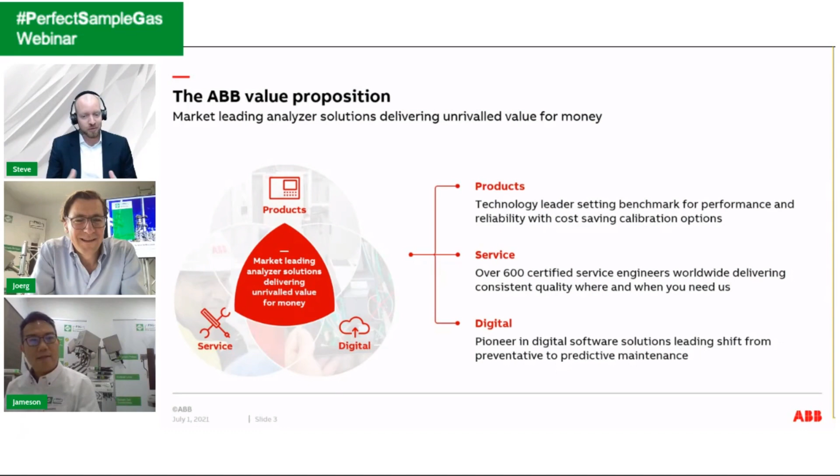And then the really fast moving development is around digital, and ABB is really pioneering digital software solutions. But today we're going to focus more on the products and then show you a little bit on the digital solutions. And I think we've got a demonstration for you as well, so I'm really looking forward to sharing that with you. Let me take you through some of the portfolio here.

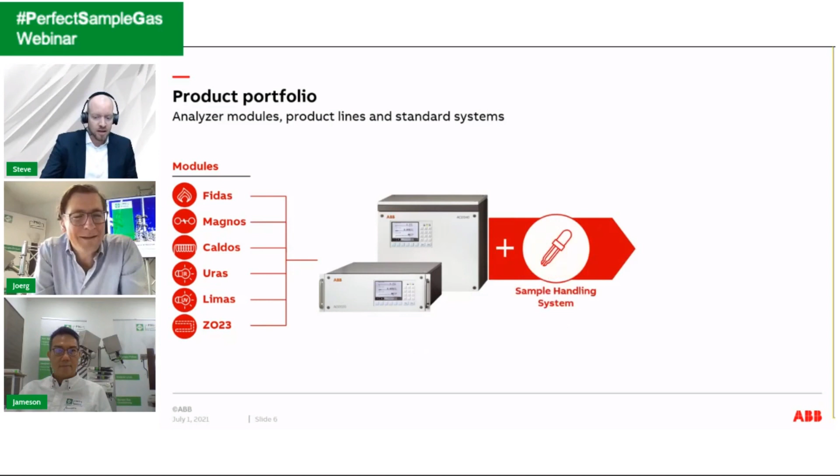Wow, but obviously, Steve, if I may ask, that means the Easy Line is more kind of a basic version. It's a little bit our philosophy where we say, okay, the inside technologies are similar, but the number of options and the number of extensions you have are more limited compared to AO. Yeah, limited to really the things that you always need for an application. So we stripped it right the way down. So you still have quite a bit of flexibility, but not as much as the Advanced Optima. Right. Okay. I got it.

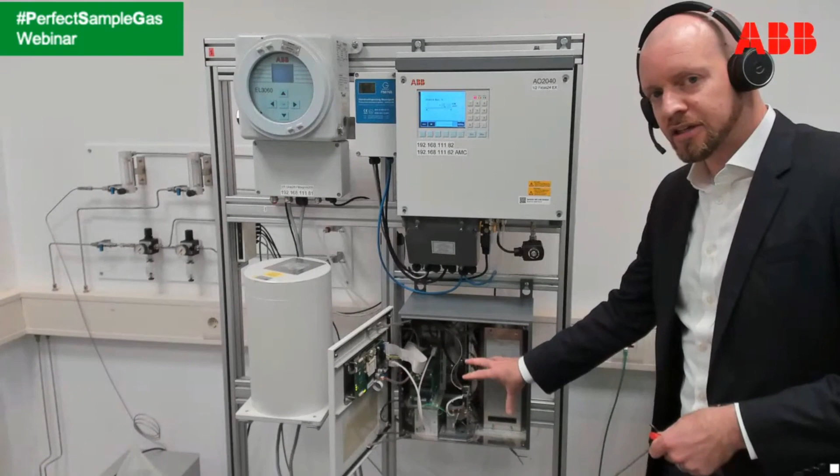Interesting. And then the other one here is the EL3040. I'll just very quickly open that box so that you can see. So this is for general purpose, but very compact. This is the Uras 26 photometer, and then you also have under here a paramagnetic oxygen detector, so that shows you the combination of the two. And then again, the same electronics, but underneath here you have a connection box which allows this to go into an IP65 environment. So you could install this outside. It's a stainless steel box, very robust, and that often for customers is very useful.

Yeah, good. Sounds interesting. I'm going to make my way back over there. See you in just a second. Okay. Wow. Hopefully you will make it. Oh yeah, that's great. Impressive. There he's back. There you go.

So Steve, let me ask you. These are new products you are releasing now. Do you also see a trend that there are more hazardous area measurements? We saw this in our product development. We released this new ATEX probe. And it's a little bit the feeling that even the measurements in hazardous areas are growing. I think in general, yes.

So maybe historically you could move the analyzer systems into a safe area, but then you compromise on the speed of the measurement. So more and more we're seeing the devices moving closer to the measuring point, and there you obviously get more into the hazardous areas, zone 2, zone 1, and that's why there is increasing demand. But I think there's also obviously a growing safety focus, and then there's more need to control the processes as well. So that's another reason why you would see an increase in demand.

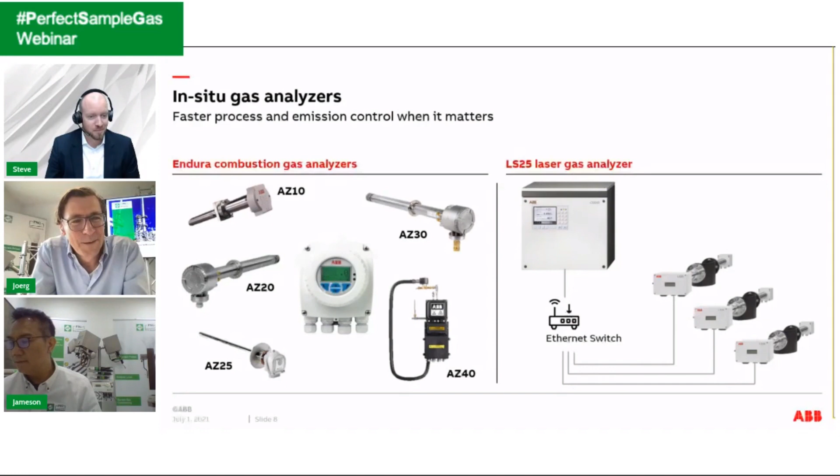Good. Then I would move on to newest developments, and here we have a couple of things to talk about. The first one is, you asked me in the preparation, what about measuring technologies and what kind of innovations are taking place there? Here I would share the example of our Magnos 28. It's a fairly new product. We launched it in 2016, and it's using the well-known paramagnetic principle, measuring oxygen. This measuring principle has stayed unchanged for 60 or 70 years.

So our vision for the Magnos 28 was to replace this glass and all of the circuitry and everything, there's a mirror on there as well, and put that into a micro wing, but also then to automate the manufacturing. So that micro wing is positioned on the wire. It's bonded to the wire, and then there are these little hooks on the side that it's also bonded to, and that then is the complete sensor. I'm not sure how well you can see this. That is the sensor there in a little plexiglass model.

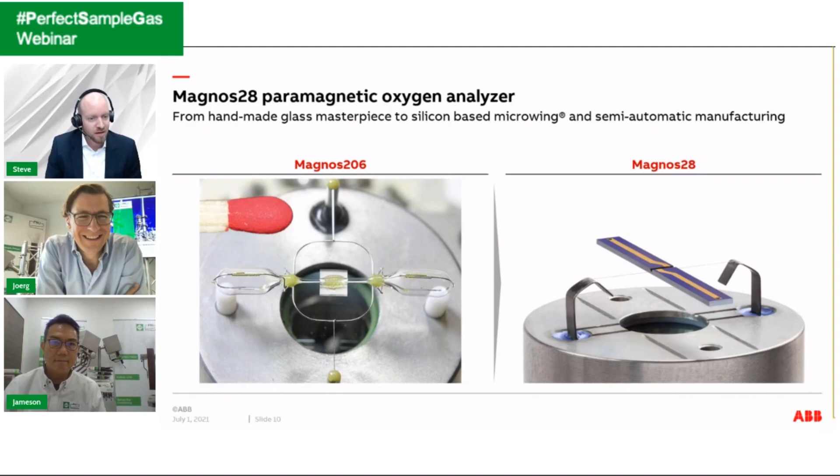Okay. Interesting. Oh, good. So that's the Magnos 28. I'll keep moving for the sake of time. The other area that you asked me to talk about was emissions and what's happening in terms of emission limit values in different industries. And I think the one that's most prominent is the BATC for waste incineration. And this will come into law effectively in 2023, lowering the emission limit values for all waste incinerators or waste burning processes. So it could also apply to the cement industry, for example, if they're burning alternative fuels.

And the good news there is that ABB has already tested one of our ACF 5000 systems on a plant in Germany, in Ulm, and passed the QAL 2 evaluation with these lower emission limit values. We're very proud of that, and it shows that it is possible to measure down at those limits. The next step, of course, would be to certify the system for those limits, and that's something that we're working on.

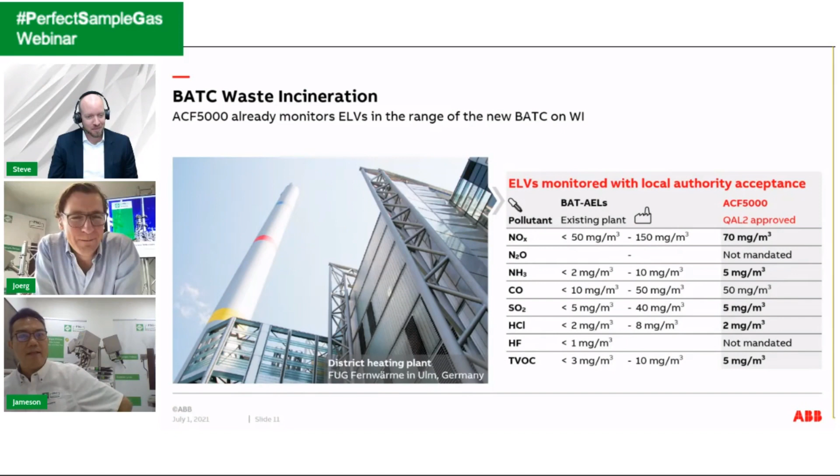Yeah, okay, but that means for all of us, keep on developing, keep on working. Yeah, there's no standing still. We have to keep moving. Yeah, it's a driver, and it's a driver for a better environment. So yeah, it's great. Okay. So the last one here in this section would be a quick intro to the digital offering.

And I'm going to do a demonstration in a minute for the dynamic QR codes, so I won't explain those in too much detail. Really what we've got here is the ability to easily transfer all the relevant diagnostic information manually. But like I said, you'll see that in just a second. So Simon is here getting ready with the demonstration.

The next one here is condition monitoring. So that takes the same diagnostic information and brings continuous monitoring to it. So we continuously track all of these different parameters and generate health check reports for our customers so that they can keep up with the health of their system. And particularly in these lockdown periods, remote insights has been extremely useful.

So remote support is quite common nowadays, being able to dial into the system and see what the customer's seeing, but you couldn't physically see the plant, you couldn't physically see the system, so you're a little bit limited. So what this does, this is a two-way video app, which allows us to sit in our factory or even at home, it doesn't matter, with the plant. So they would carry a smartphone or a tablet or maybe even a headset, look at the system.

We see exactly what they see, and then we can overlay instructions to them and talk through those instructions as they're working through it. So that's been really, really useful. We were quite lucky, I would say, that we had that solution about ready before the first lockdowns came. Yeah, that's what I wanted to outline.

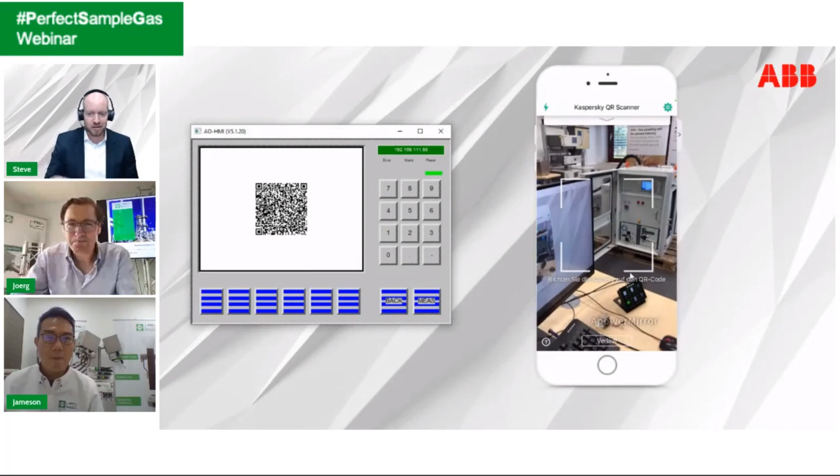You can see the marine system that we're about to show you a bit later on. And he can come to the QR code, scan that in. And what you see now on the screen is all of the coded information that comes out of that QR code.

And I'll just pick out a couple of things there for you to see. So this is the serial number for the product. You've got the software version. It's got all the different analog. Okay, I think it's not so important. So what you can see there was all the coded information. And what's even more important for you is to see, that works.

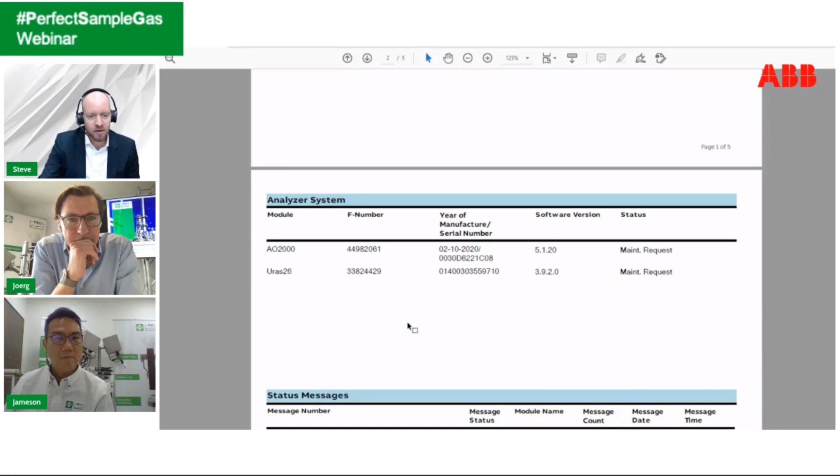Okay, so this is when we receive it at our end, we can then decode all of that and generate a report. And this gives you some insight into what you would actually see in the report. So it's now fully decoded. It tells us that we have an AO2000 system with a Uras26 analyzer with the different software versions. You see there, for example, that the cooler condensate level is too high. So that comes from one of the status signals.

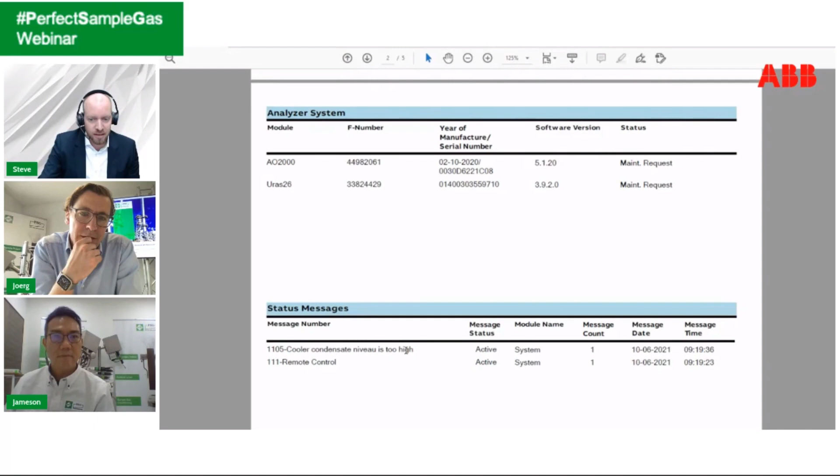It shows that we're in remote control status. You've got all the different I/O modules, the number of I/O modules. You've got the cooler temperature here, which is very useful. Yeah. This is so interesting. It's so interesting to see, especially the information from the conditioning system.

I noticed now in China, there's regions where the authorities request not just the emission value from the system, but also information about the sample handling system. And that's just interesting to see that this is logged there, and it's very valid, very important information, right? It's hugely important, and for years we've had the approach that we need to have the data from the sample handling as well.

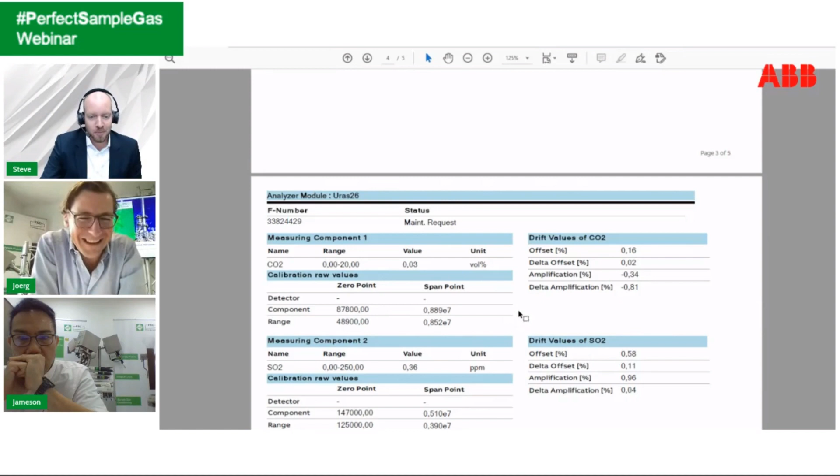So we have this CAN bus network that we build into all of the analyzer systems that take the signals from the sample handling components into the analyzer. And that's how we can get all this diagnostic information through the QR code from the display itself. Oh my gosh, yeah. I think we have to look at the time a little bit, but it's just super exciting to see. So you can see with one shot, you've got all the relevant diagnostic information, and that really speeds up the whole fault finding, troubleshooting process.

And even if you don't have a smartphone, you can take a picture with anything and just send us the raw picture. That also works. Then we can decode it on our end. So this is hugely exciting.

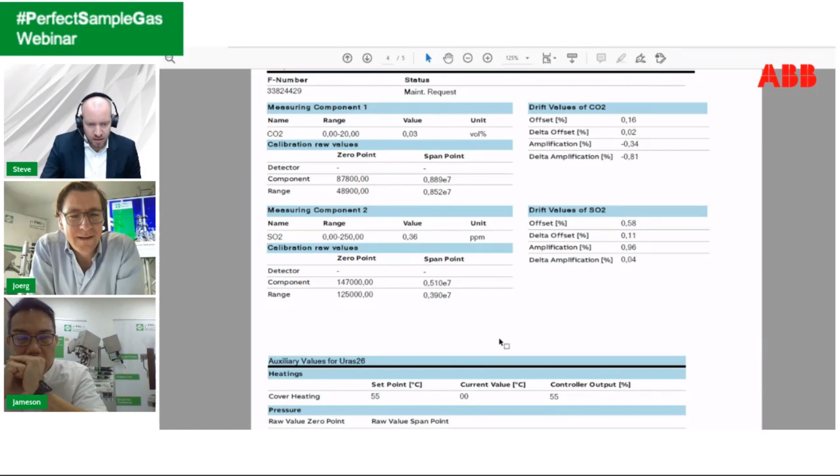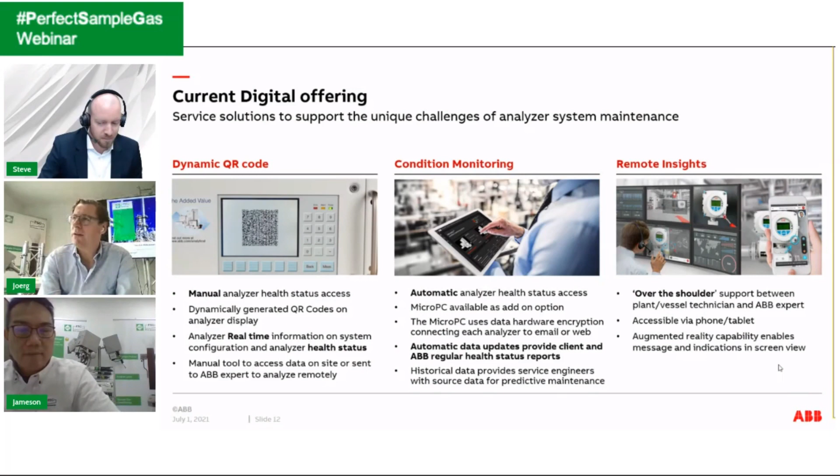What I would do now is come back to the presentation. And like you said, we need to be aware of the time here. And I would like to see you all as well. Good. It's always super interesting. I think when you jump into one topic, you think, wow, we could talk just 1 hour about this, but yeah, okay. 1 hour is quite tight. It's a lot to cover, I know that.

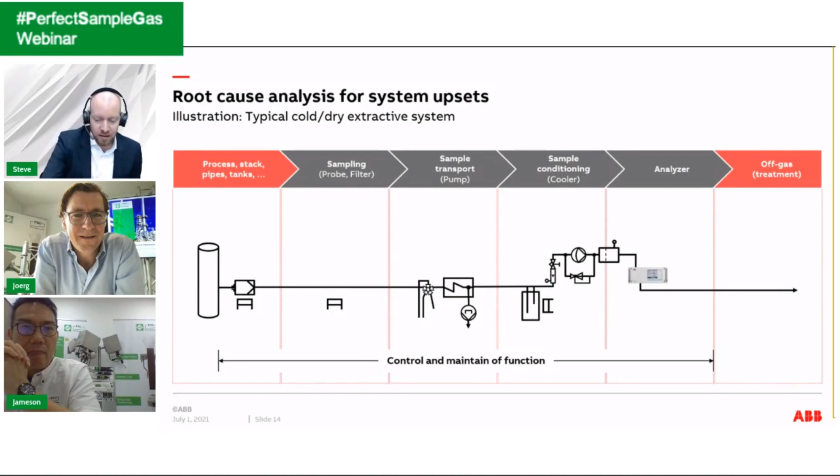What's really interesting here is we did a study a number of years ago looking into the typical failures of a cold dry extractive system. We spoke to a lot of customers who helped us gather data on that. And really interesting is that we learned 70% of all the upsets in the analyzer system are coming from the sample handling system. And of course, that doesn't mean that these components are not reliable and keep failing.

It's not that at all. It's because the system is not designed correctly from the beginning, or the maintenance is not performed correctly. So that's important to mention. And then when it comes to the analyzer, go ahead, Jörg. No, really, Steve, it's great to have this number here. I remember I saw this the first time in India, when your colleague Christopher Becker did a presentation and shared these numbers, and I was really, wow.

This really outlines the relevancy, right? Thank you for sharing this. It's interesting. Yeah, and then on the analyzer themselves, 25% of the failures would come from the detector. So that could be optical components, it could be contamination in the cell. And then only 5% of the failures that you typically see are to do with the electronics. So it's really important to keep that in mind, and then also take seriously the design of the overall solution.

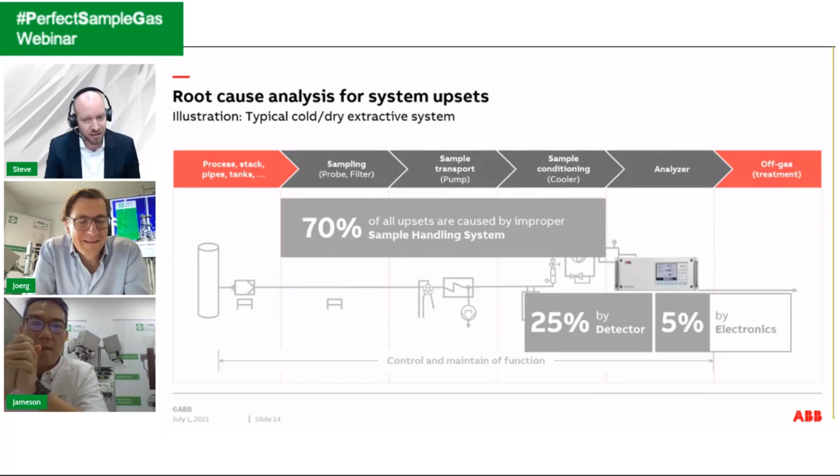Right, yeah. And for this reason, we also at ABB take it one step further in that we offer a pretty complete lineup of sample handling components. So on the probes, we have unheated probes, different grades of steel. We have a ceramic version as well. The heated probe, if you need to make sure that you're transporting that gas in the same condition. That's the probe 42. We have a number of filter units. Actually, I want to show you one of those in a minute, briefly.

Different types of heated sample line with self-regulated fixed resistor heating, cooler feed unit, thermoelectric type coolers, and then we also have the SCCS, which is a Peltier cooler, but a fully contained conditioning unit. And then on top of that, we have NOx converters, a utility unit for power distribution, and a number of other accessories.

Yeah, Steve, let me ask you. That's what you said in the slide before. You said it's not because of the reliability of the components, but very often, and I think, Jameson, this is something you must celebrate, because that's what you always say. You say you cannot copy and paste a system. If a system works fine in this application, you might need to choose other components, right? So, Steve, is that the reason why you have a selection of different types here?

Yeah, I think there are certain elements of the system that you can apply to a very wide range of applications, but it's absolutely right that every application is slightly different. So there's always going to be a need to have special adaptations of that system to suit that particular application. Okay. But we also have different systems depending on the application as well, and you'll see that in just a moment.

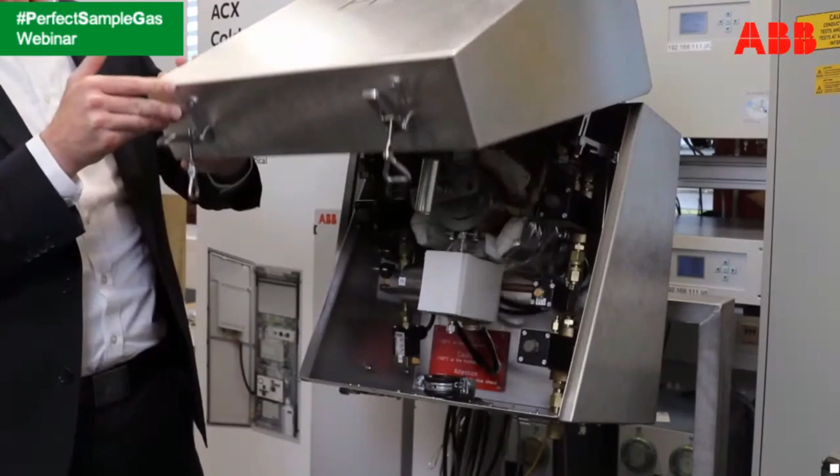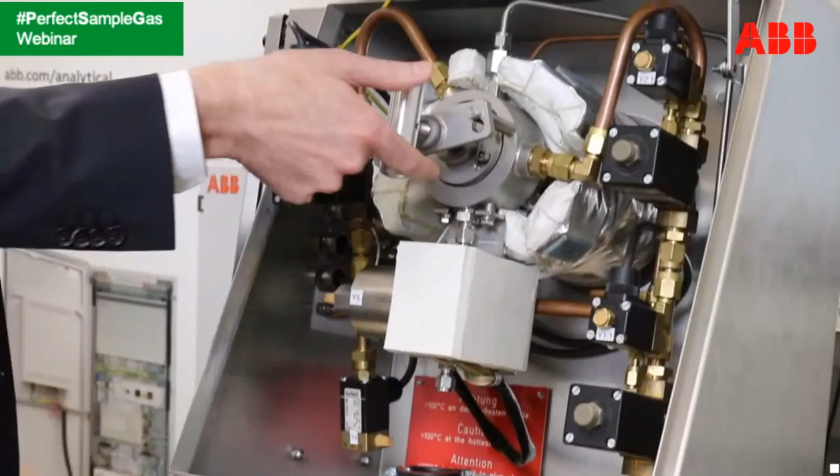So this is the inside. You can see a big heavy duty stainless steel box. The sample line comes in from underneath and connects to this valve here coming into the filter unit. I won't demonstrate that now, but it's very easy to turn this and pull the filter element out for cleaning or for replacement. And then what you have around here is the back purging system. So very heavy duty pipes, which means you have a lot of power there for the purging, and you can purge from the inside and also the outside of the filter to make sure that it's really clean.

I won't say too much more about that. If you guys would like to comment, feel free, but I'll make my way back to the other screen. Yeah, I think it's just very nice to see. There are some things we heard from you now which we always say. It's important, especially the probe, the primary filter unit, because it seems like the philosophy is a little bit similar: everything you are not getting into your sample handling system can remain outside, with very efficient filtration and also low maintenance, which is what I understood from the back purging.

And yeah, I think it's interesting to see. Absolutely, and we like this concept very much with the heavy duty back purging. We don't see any other solution out there that's quite as robust and suitable for those challenging applications. But at the same time, a little bit comparable to the concept of Advance Optima and EasyLine, you also have different options there, right?

Because I think it's important to say that if you have a super clean measurement, a gas power plant is something which pops into my mind, you don't need to have this fully equipped probe system, right? That's where the PFE3 is ideal, because it's self-regulated heating. You can equip it with the back purging, but it's very often not necessary, and that's a smaller box. And of course, you save some money there too. You don't want to spend money unnecessarily. Yeah, I think that's interesting.

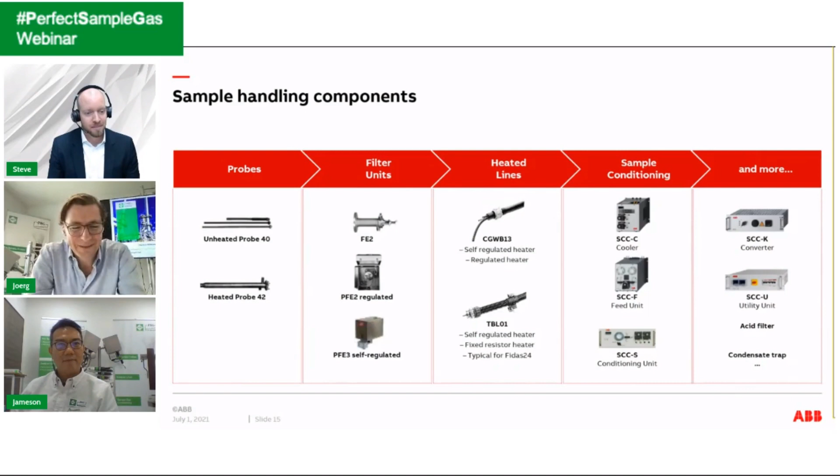So I would come back and continue on the track here. We talked about cold dry systems, and now I want to share an example of a hot wet sample handling system. This is very similar to what we have in the ACF 5000 system. Really the challenge here is you need to have every single component of the system heated to 180 degrees C, which sounds pretty simple, but in actual fact it's very challenging to do properly. If you had all of these different components, each with their own heating and insulation, it's really not easy, and it's very difficult to maintain that system as well.

That's a little bit surprising, right? Because if you look at this graphical overview, it's not a P&ID, I would say this system should be way easier because you don't need a cooler. So there's one component left. It will only cost half of what the other system costs. So the challenge is the interfaces, or where do you see the biggest challenge, Steve?

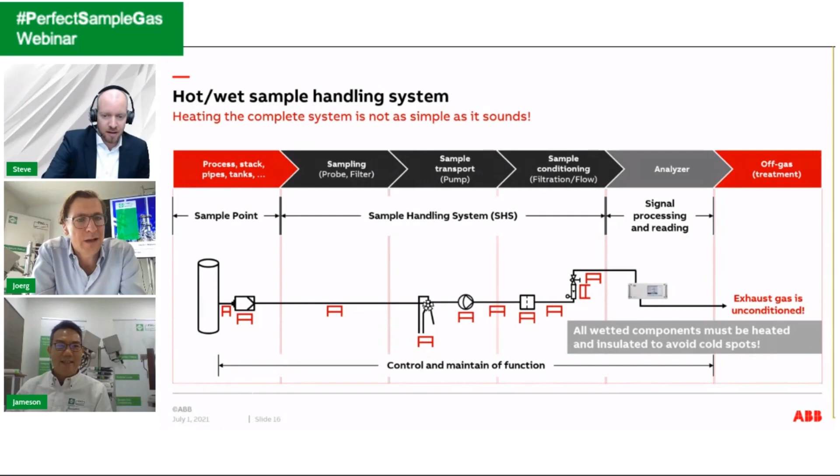Exactly. So the keys for designing the system are, of course, making sure the temperature is maintained, but the art form, if you like, is to limit the number of connections between the different components of the system and make sure the distances between those components are minimized. Really take a lot of care about any parts in the system that are going to wear, because you're at a much higher temperature. So diaphragms and O-rings, you need to carefully select the materials there.

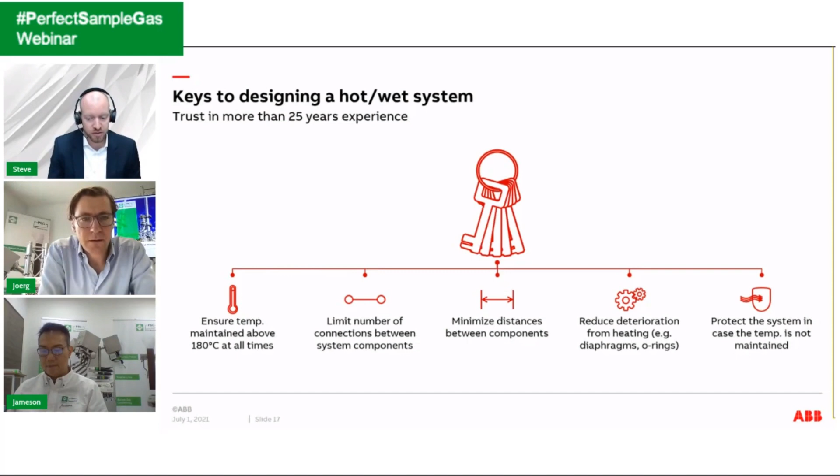And if for whatever reason the system is not maintaining that temperature, then you have a risk that you put an unconditioned sample all the way through to the analyzer. So you need protection measures in place to make sure the analyzer is protected if the temperature is not maintained. So the ABB solution there, this is an example from the ACF 5000. I won't talk you through all the details, but that's the schematic.

And really the heart of this system is what we call the ASP block, which is an aspirator block. So you have in there an injector or an eductor, so there are no moving parts. We use instrument air to create a vacuum and pull the gas through. This whole block is machined out of one piece of metal. A lot of engineering is involved, and that's really the key to making a hot wet system simple but also reliable.

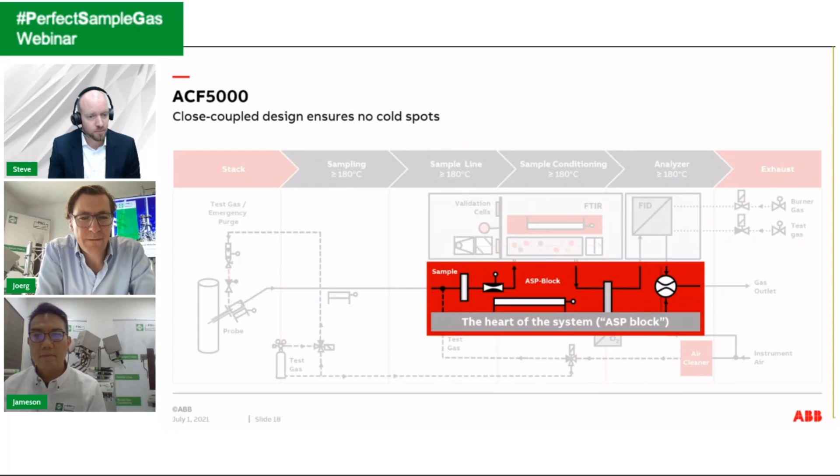Right, I got it. So the first part, probe, heated line, and then you already have the direct connection into this ASP block, and then you've got a filter here, flow control. You've got the zirconia cell, the FTIR, and the FID. Okay, so in the end it's very simple, but it's not simple to realize. Of course, you have to put a lot of thought into that.

Yeah, and I think it's also interesting what you say because you are delivering these systems worldwide, right? Yeah, exactly. So you have a temperature range from, I don't know, -20 up to measurements where it's very hot. Plus 50. Yeah.

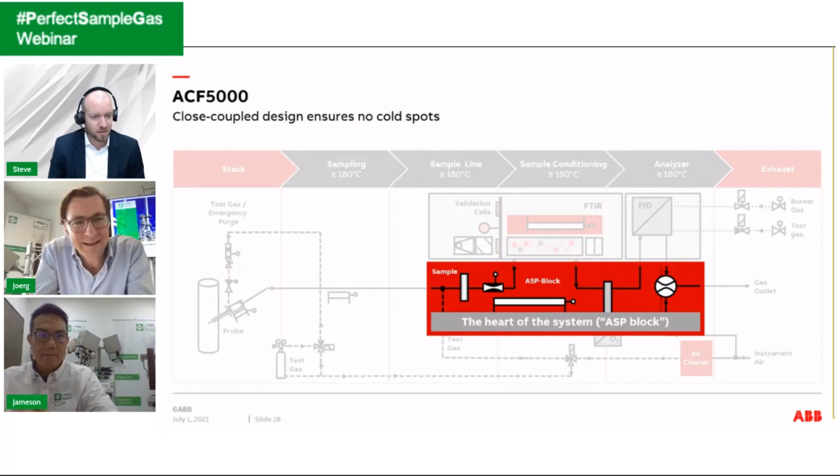I would think it's interesting to see. I mean, it's super complicated, these analyzer systems and solutions. But then you always also have to face the environmental conditions, and this can sometimes be tough, not to get too high a temperature. Because the temperatures you mentioned there, Steve, 180 degrees C heating, for some components that's already coming closer to the limit, right? Yeah, that's a challenge. It certainly is.

Good. So you mentioned before about different solutions for different applications. So these are the 3 standard system solutions that ABB offers. One is the easy system. So this is really for measuring CO and oxygen in crematoria or small boilers, that type of thing. So you can really simplify the sample conditioning down to standard components. And this is a plug and play concept that ABB has, where you really just take these different modules and

put them together. The AO2000 system in the middle there is more towards power plants, iron and steel, pulp and paper, and maybe certain applications in the chemical industry as well. And then ACF 5000 is the one that we just mentioned, which is for your waste burning processes, measuring a long list of components, and that's a hot-wet system design. That's the high-end solution, let's say. Yeah, the multi-component, all-in-one, so to say, for this type of measurements. Exactly. Yeah, that's interesting to see.

Yeah, thank you for sharing this. I think what is super interesting, when we had the preparation here, and I think that's a topic which is touching our whole industry, our niche industry, is what will be future measurements? Because if you mention now, Steve, the easy system, for example, for small boilers, and then we talk about the AO2000 system, for example, for power plants, coal-fired power plants. We see the developments here in Germany, we see the developments in Europe, and we see that the decarbonization of the world is a big topic, right?

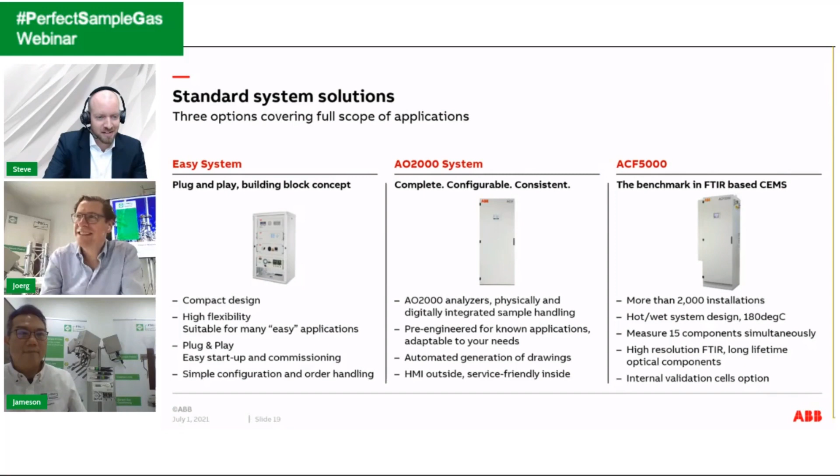And I actually have a solution to show, which we've just been doing a training for a major scrubber manufacturer. And so by chance, we have the system all set up here, and I wanted to just quickly talk you through that. Yeah, I think it's just super interesting to see, even in this industry, that there are new applications coming up, right?

And yeah, it's never boring. It's never boring. Yeah, which is good. It's good. Keeps us busy. Okay, again, Steve, I think we will not see your head. No, that's okay. I think you have to look at my legs, unfortunately. But let me just revert there. Okay. The resolution there is not great, but we get the idea. We get the idea.

Okay. So this is a system called the CEMcaptain. So this is my hand. You just saw Simon's hand here. So it's very much the same concept as the other systems that we showed you, except that we've really built it into a more compact system specifically for the ship, and you'll see in a moment some of the modifications. What's nice here is that the analyzer pulls out on a rack here, so if you need to get in there for maintenance, that's very useful.

You've got an extra door here which you can also open for maintenance, which is also useful. There's an Ethernet port for service, so if you need to come in and connect up your laptop to communicate with the system, that's very easy. And then you've got the cooler and the feed unit here at the bottom. I would then switch to the side view. Just give me 1 second.

Simon, can you hit that one for me? I'm quite impressed how smooth that runs here. We have a little control panel. It's pretty nice. So now what you're seeing is the side. So you can see this door on the side. And what you can also see at the back of the cabinet is the vibration mounts, the dampers.

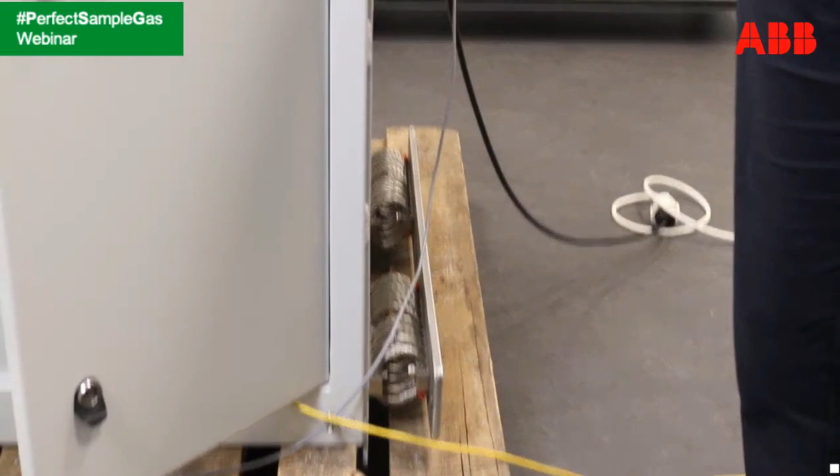So that's something very important for the marine industry because you're faced with much more vibration. So these are selected very carefully depending on the frequency of the vibrations that you would have on board the ship. Okay, now I've messed it up for Simon because first of all I was supposed to show you the inside of the cabinet, but he's going to zoom down for us. So this is now the side of the cabinet, so that's also very nice for maintenance.

I mentioned before these yellow cables, perhaps people didn't remember that. You can see them at the back here, these yellow cables. And this is a CAN bus network. So the sample handling components are connected into this CAN bus network. And these same cables come up through the system and connect to the back of the analyzers. And that gives us all the diagnostic information for the sample handling as well as the analyzer in one place. So that's really, really useful because it gives you that visibility into everything that's going on.

So the entire size of this cabinet now, Steve, is this comparable with any other system? Yeah, maybe the easy system that you saw, the first one. So it's a very similar size, it's about waist height, at least for me. But I'm relatively tall, so keep that in mind as well. Okay. No, that's good.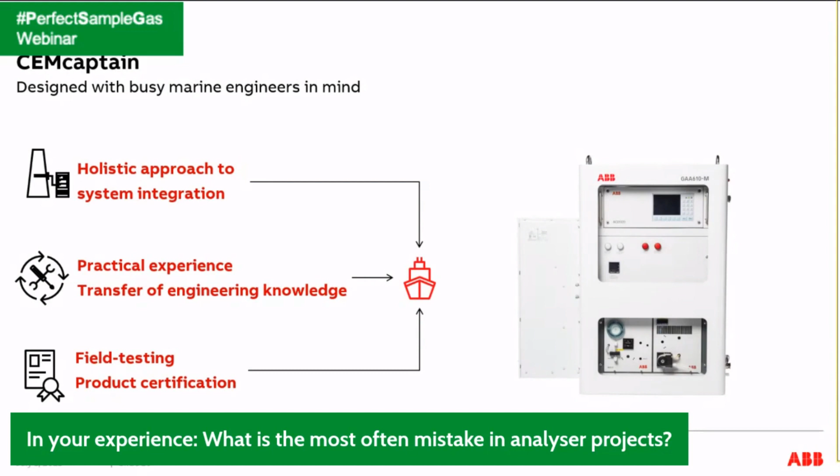Stephen, in your experience, what would you think is the most common mistake? So if people are watching here, what would you recommend to them? Yeah, I would think, well, to be honest, one of the things we see very often is that the overall cost of ownership of the system is not fully appreciated at the beginning. So the initial purchase decision is very often a cost-driven decision, but that can also mean that later on you suffer because of more maintenance required, failing components that end up costing you a lot more.

So that's a very common one, but of course also in the design of the sample handling system, like you said, Joerg and Jameson, the copy and paste approach often doesn't work, you really need to make sure that the system's customized for that specific application.

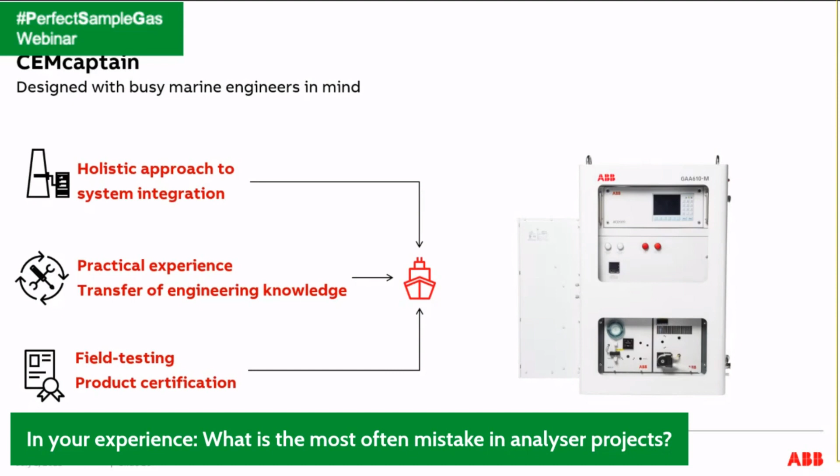Okay. And I think one is very clear, to select the wrong supplier is one of the most common mistakes. Okay, just kidding. Okay, yeah, then let's have a look here.

How do you see the future? What do you think? I mean, especially for us, it's a very important question as we produce sample handling components. It's a similar question to hot, wet, cold, dry, about extractive analyzers and in situ measurements. Yeah, well, I think the in situ measurements have their place. So if you're measuring a few components in harsh process conditions with high temperature, high pressure, corrosive gases, and maybe the speed of the measurement is very critical, that's where in situ fits.

But if you need to measure multiple components, and you also need to perform maintenance on the system quite frequently, especially for emissions, where you have to calibrate or at least check the drift of the system regularly, that's where extractive for me is still going to remain the choice. And we see statistically, in 90+% of the cases extractive measurements are chosen, exactly because it's so much easier to maintain them in a nice clean environment.

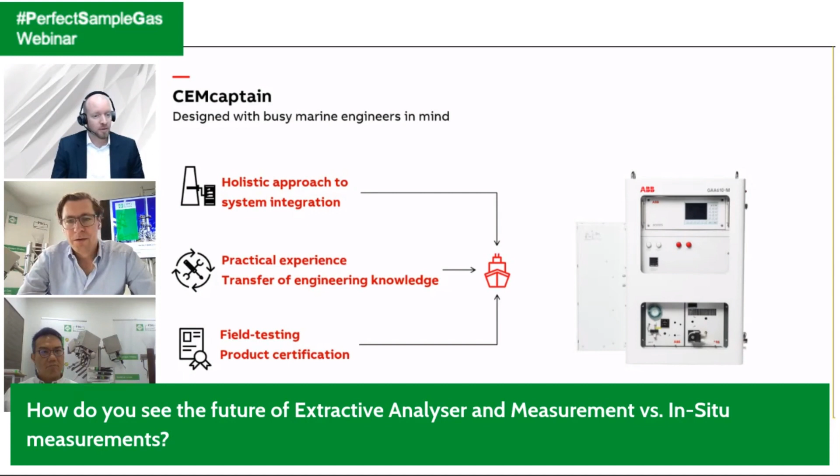Okay, Jameson, this is good news for us. No, okay. All right, last question, Steve.

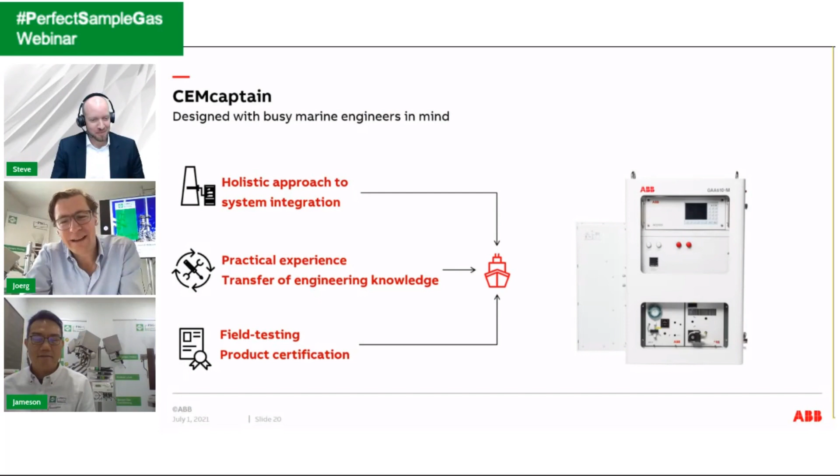And I think then really we should come to an end, but I'd also like to have this point of view. Today we focused a lot on emission monitoring. We know that the world of emission monitoring and process measurements cannot be fully divided, right? But still, what is the ABB point of view on which role we can play to achieve the reduction of emissions?

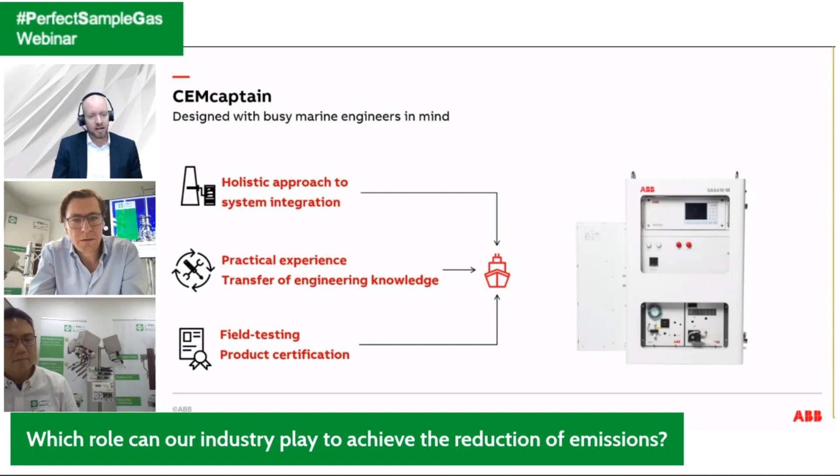What we're seeing right now is a massive shift in focus towards circular economies or sustainable operations. So how can you decarbonize industries that by the nature of the process produce quite a lot of CO2 emissions? So there's a huge activity towards hydrogen, green hydrogen, electrolyzers powered by renewable energy. And then also the importance of introducing oxygen into certain processes so that you have a much cleaner combustion and a much purer exhaust stream.

And analytical measurements are going to play a key role there in controlling those processes, but also helping industries like cement, iron and steel, and the petrochemical industry to decarbonize. So I see the role of gas analyzers as very important in that, and then there'll be the traditional measurements too. If you add, for example, carbon capture and storage to some of these processes, you'll also see additional measuring points for analyzers that will be critical to control that process, but also to make sure that what comes out of those processes is clean and safe for the environment. Yeah.